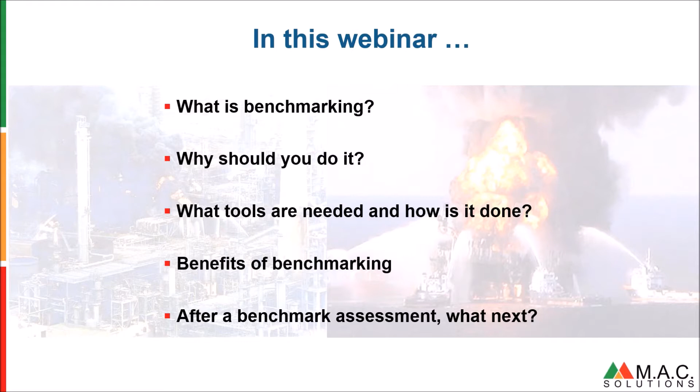So as an opening thought on the screen there, if you were asked to tell anyone, a regulator or a senior manager further up in your company, how well your alarm system performed, could you actually tell them, hand on heart, how good your alarm system is? And how would you be able to do that? The way you would do that is by measuring your alarm system.

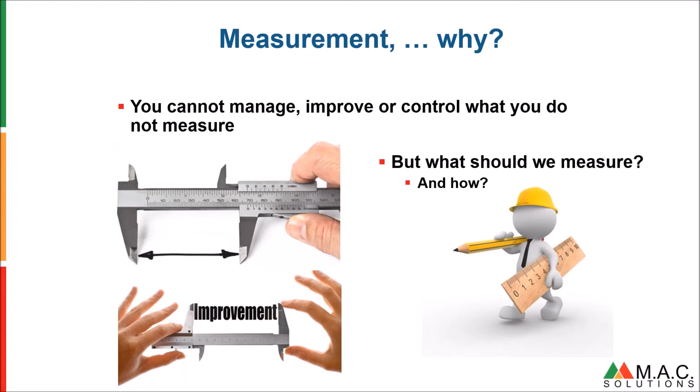And I'm sure we've all heard typical quotes and adages: you can't manage, improve or control what you don't measure. You've got to do some kind of measurement. The real question you want to know is, okay, what am I going to measure and how am I going to measure it? It's all about alarm system benchmarking. What and how. They're the really important things today.

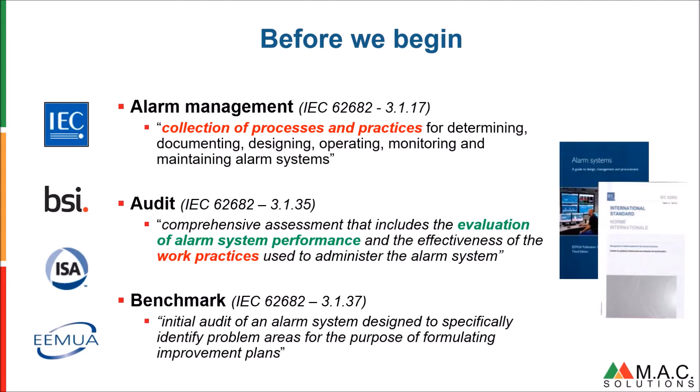So looking at audit and alarm management, yes, we're looking at numerical performance, the alarm system performance, but we're also looking at work practices and processes. It's not just a straightforward numbers game. So just moving on, if we look at the alarm management life cycle, if we're going to look at improving our system, we need to know what it is we need to improve. And that's the whole point of doing a benchmark assessment.

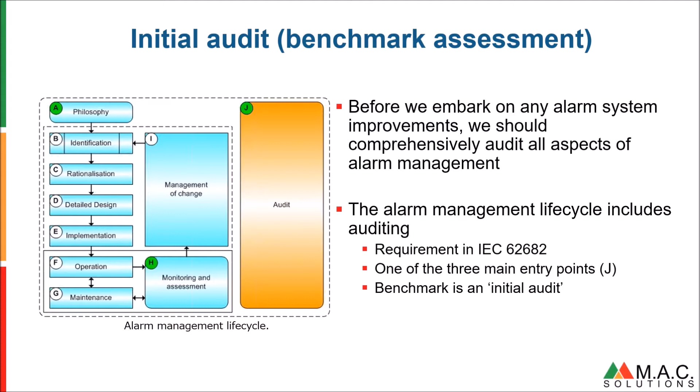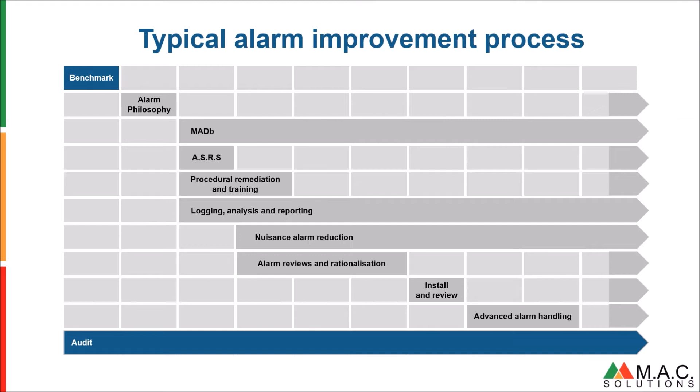But you are also going to need to review your control system. Is it configured correctly? Are there any design guidelines, default set for alarms? Alarms should be turned off unless justified. Hysteresis settings, for example, and timers. How are they designed? You're going to be looking at site procedures as well as your control system.

And in site procedures, let's look at alarm philosophy. Is there one? Is it appropriate? Does it comply with the requirements of the standards? What about procedures such as management of change? Is that appropriate for alarm management? Do you have procedures, for example, for shelving of alarms? And more importantly, while you're looking at these things, are they actually used? Are they in general use?

In order to do all these things, and I will elaborate a little more in a couple of slides' time, ideally you want to have a consistent approach. You are going to interview operators on the plant at their place of work. That's really important that you carry out your operator interviews to find out how the system works for them. Not how good or bad the operator is, but how the system works for them.

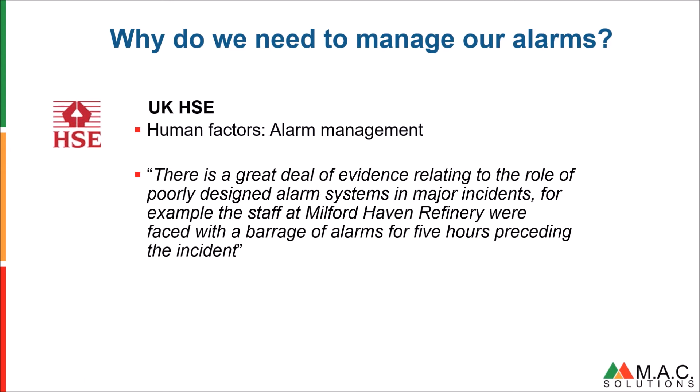So why do we need to manage our alarms? The regulators expect it. If you're in the UK or Europe, Seveso regulations or the COMAH regulations in 2015, which is the enactment of the Seveso directive in the UK. This is a legislative requirement. There is a requirement for you to manage your alarms. It's not an option. So there may be in other countries other regulations and other directives which must be complied with. So why do we need to do it? It's expected, and in some cases you have no choice.

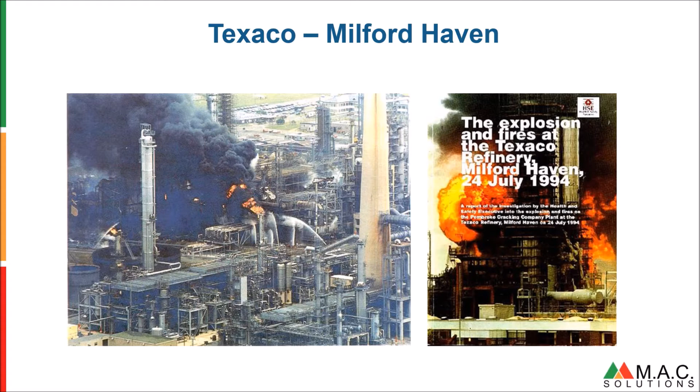Briefly looking at the Texaco Milford Haven incident, which happened in 1994, there was an explosion and some fires on a chemical plant. Our Health and Safety Executive in the UK carried out an investigation. Fortunately, no one was killed, but about £48 million was lost. 26 people were injured. The HSE commissioned a report by two guys called Bransby and Jenkinson. And the key factors they came up with were there were too many alarms and they were poorly prioritized.

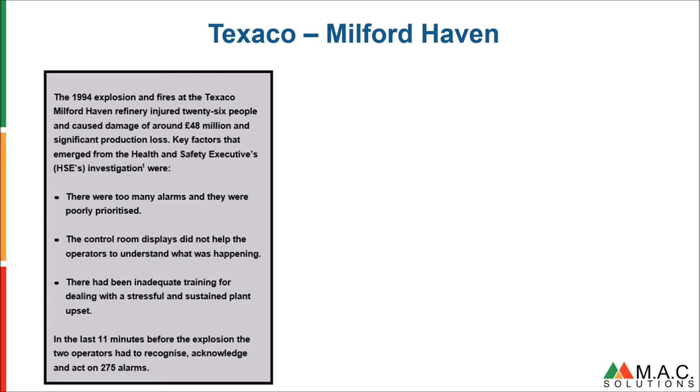I believe about 87% of all the alarms on the plant were labeled as high priority. They had 275 alarms to deal with in the 11 minutes before the explosion. That's 1 every 2 seconds, approximately. The guys had no chance to deal with the alarms. They couldn't control it. Maybe they could have done if their alarms had been more appropriate. Control room displays didn't help them.

So questions you should be asking yourself as part of your assessment, as part of could you justify how your system works: do you actually know how many alarms are in your system? Have you reviewed the priorities? Have your operators been trained? These are some questions you should be thinking of that drive you towards having your benchmark assessment.

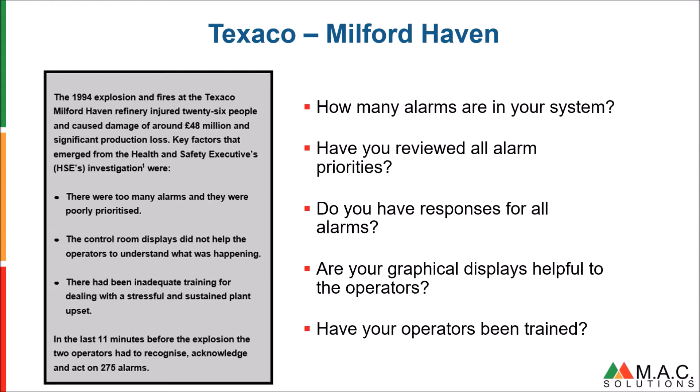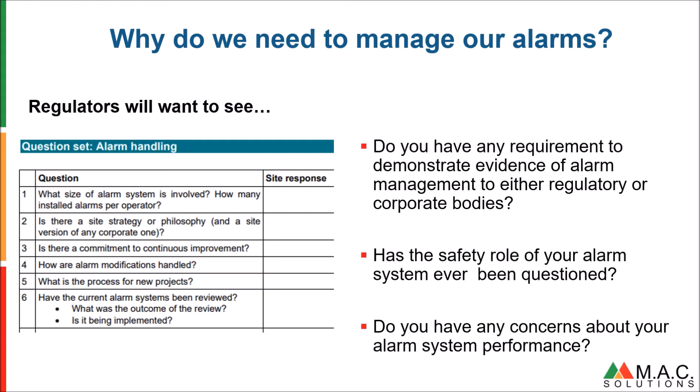That's one question. What about your alarm system performance? If you operate a control system, as opposed to you go to a control system as an integrator or a consultant, do you walk into the control room and hear the alarm system going beep, beep, beep, and you walk out of the control room thinking, that's not good. We need to do something about that. What are you going to do? And how are you going to do it? Your benchmark assessment will tell you.

What if I think it sounds a lot of work? Do I really need to do it? What might it cost if I do nothing? Okay, there's a potential for harm to the environment, to people. You may face regulatory prosecution, fines. Okay, really? Is that going to happen? Regulators and the judiciary, certainly in the UK, are getting tougher. Let's have a look at briefly 2 examples.

Last year in 2017, although not all to do with alarms, a water company was fined £20,400,000 for environmental breaches. During the trial, the prosecution made statements: alarms going off for days on end, certainly for more than 24 hours. Another alarm should have been dealt with in 2 hours, took 37 hours. These are statements from the prosecution to do with alarms.

The water company were given 21 days to pay, and they were told that the costs had to be borne by the shareholders, not the customers, and the courts would be watching to make sure that was the case.

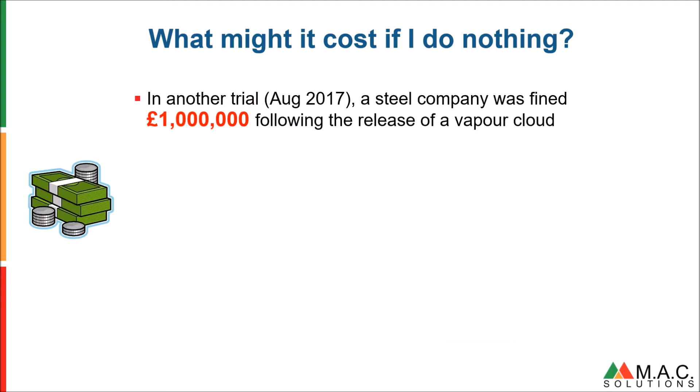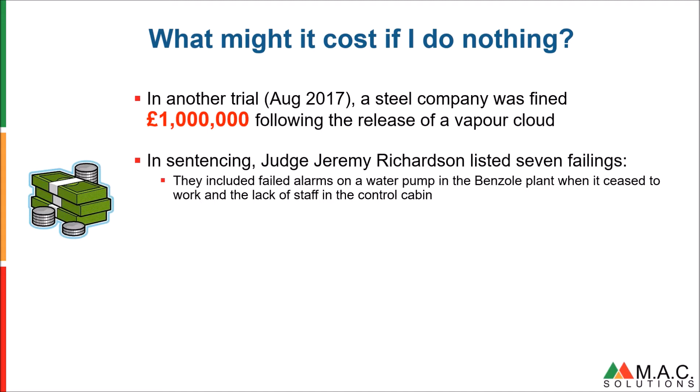Another trial last year, a steel company was fined £1 million. In sentencing, the judge listed 7 failings. They included failed alarms, a lack of staff in the control cabin. Something you might consider looking at when you're doing your benchmark assessment. Is the alarm system in an unmanned control room? Is it manned all the time? Do they have an appropriate number of people to respond to alarms? Just something else you might like to think about in your assessment.

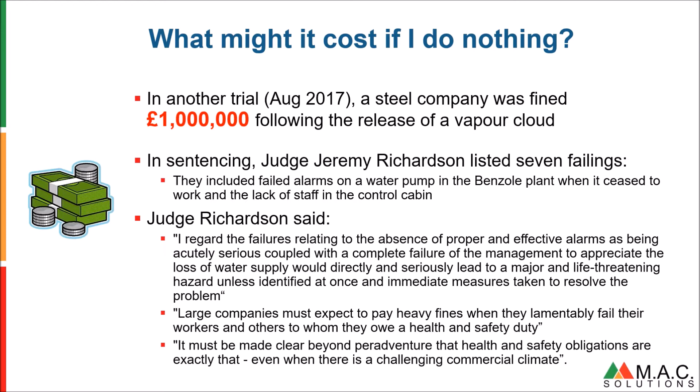When the judge summed up, he regarded the failures relating to the absence of proper and effective alarms as being acutely serious. Large companies must expect to pay heavy fines when they fail in their health and safety duties. It must be made clear that health and safety obligations are exactly that, even when there's a challenging commercial climate. Yes, alarm management will have a cost associated with it, but that cost has to be less than the fine that you will attract if you do nothing. And that's what's happening with regulators and judiciary at the moment.

So, bearing that in mind, as an operator of an alarm system, how confident are you that everything's being addressed and everything's working properly? Do you absolutely know without doing a comprehensive benchmark assessment? I carried out a benchmark assessment about 4 or 5 years ago on a pharmaceutical site. They were regulated by the FDA. They were making pills. They were a top-tier COMAH site, which is control of major accident hazards, for those people who don't know that. And they had an environmental permit.

In their COMAH report, they had taken credit for alarms in protective systems. So operators and their response to alarms were part of the layers of protection for the safety systems. The FDA required that before batches were started, a campaign of batches, they had to test certain measurements and alarms. It was all in their regulatory requirements. In the environmental permit, a number of alarms were identified that were fundamental to the monitoring of point source emissions to atmosphere, to water.

Unfortunately, on this site, alarms were not only routinely ignored, but they were turned off, because the operators had been told the control system has been configured to take care of everything. If an alarm occurs, it will be put into a software safe state and you don't have to worry. When you come back from your meeting, and yes, they did leave for 2, 3, 4 hours at a time from the shop floor, when they came back, all you have to do is press retry. It'll all sort itself out. They were in breach of all their regulatory commitments, and they didn't actually realize this until I did an assessment and pointed all these things out.

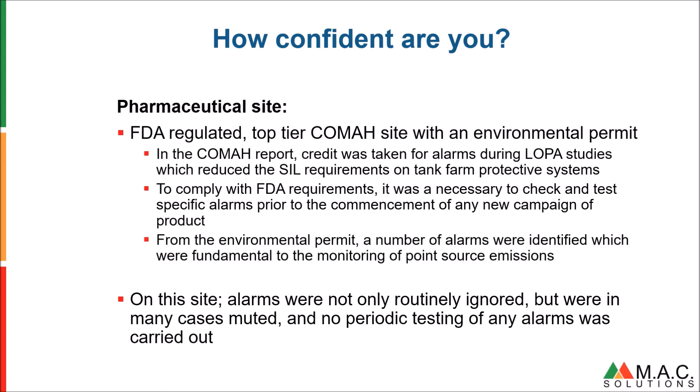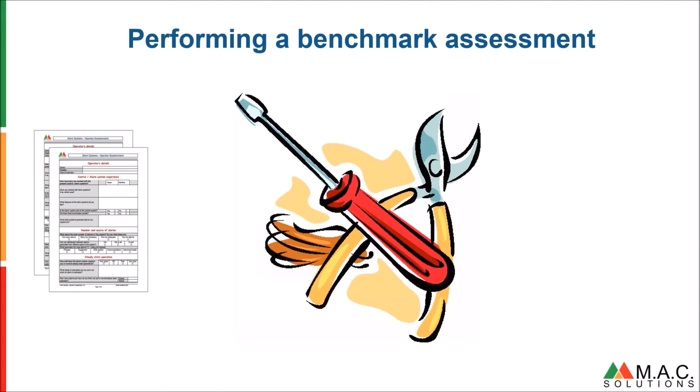So, just something to think about. Is there anything like that on your site? Are you aware of everything? Does everybody understand their requirements and their regulatory obligations? If not, how are you going to perform a benchmark assessment? Do you need any specialist tools? Okay, I've mentioned pre-prepared questionnaires before. There are some examples in the EEMUA guidelines that you can use and build on those questions, little aide-memoire notes to remember things. So you need some questionnaires.

You're going to need a software analysis tool, such as ProcessVue Analyzer that MAC Solutions provides. We sell a tool for looking at your alarm rates. How many alarms per 10 minutes do you have? Is your alarm system overloaded? What are the frequently occurring alarms? You will need some kind of software tool to analyze your data. That's part of your assessment.

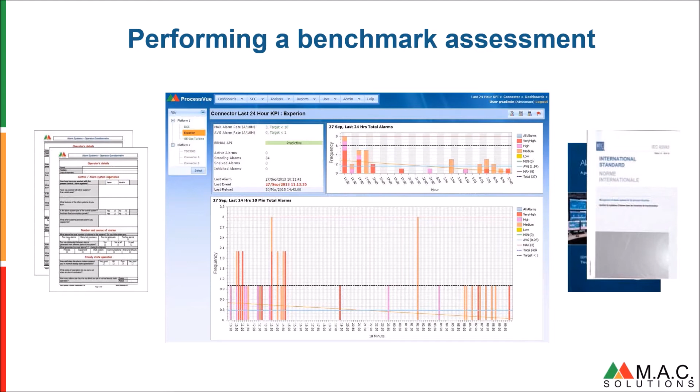You will also need, obviously, the current versions of standards and guidelines. They're the real tools you need. So some are easy, software questionnaires, you can write them out yourself, copy them out of the EEMUA guidelines. You will need an analysis tool like ProcessVue Analyzer. You will need the standards and guidelines. Two other essential tools you will require, your eyes and ears. Because when you're interviewing operators, when you're looking at processes and procedures, you need to observe and listen. That's an essential part of doing an assessment.

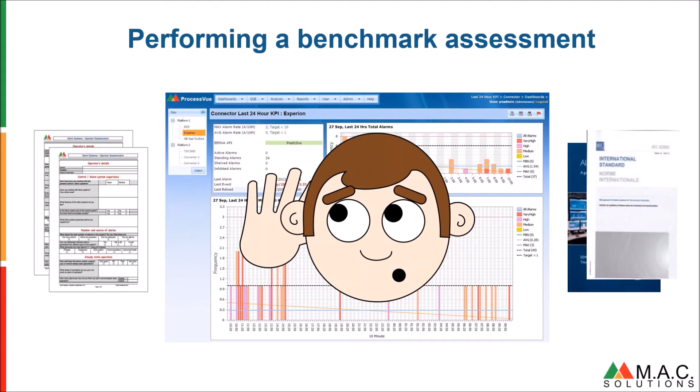Because, for example, an operator will tell you when you interview him, this is what I do, this is how I respond to alarms, this is how I shelve alarms. While you're writing your notes, listening to the guy and watching what's happening, sorry guys, we need to learn to multitask for this job, while you're doing that, you'll actually probably observe the operator doing something different to what he's just told you. So observation, listening, it's a really important tool. So they're the basic tools for performing a benchmark. Okay, if we move on, numerically, with our analysis tool like ProcessVue Analyzer, we're going to look at the alarm rates.

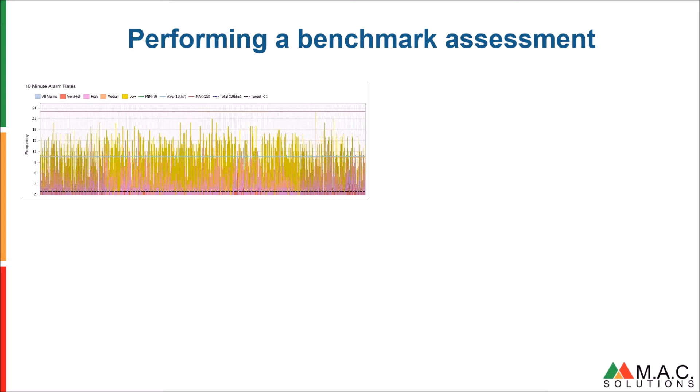How many alarms per 10 minutes do we get? What are the most frequently occurring alarms? What is the distribution of priorities of alarms annunciated to the operator? These are three metrics that are part of the standards. They're recommended in the standards and the guidelines.

In the EEMUA guidelines, there's also a thing called a usefulness questionnaire, which you distribute to your operators prior to your assessment, so there's some pre-work to do, and they assess or rate 10 consecutive alarms during their shift. Is it a useful alarm? Do they carry out an action? Is it a nuisance? And you build up a usefulness view of the system.

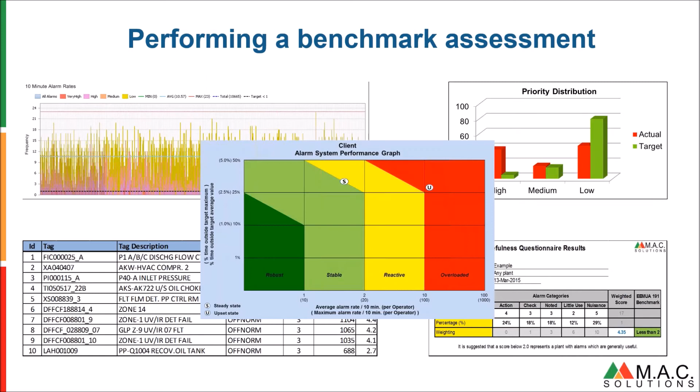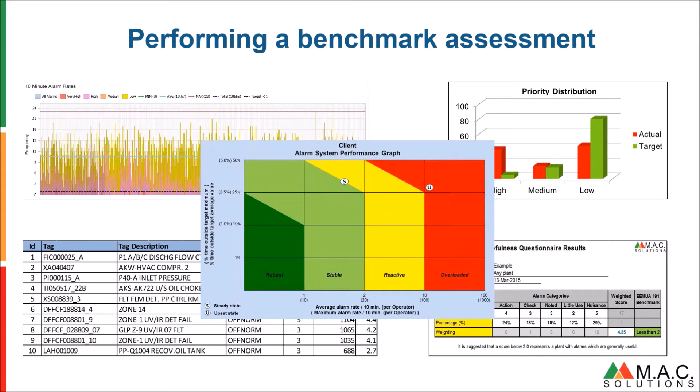You'll also look at potentially, again in the EEMUA guidelines, there's a word model for the performance of your system in steady state and upset state. Is your system overloaded? Is it robust, stable? A number of measurements. So they're numerical measurements, which you will get from your numerical software analysis tool.

Okay, but that's just one small part, alarm system performance at the bottom of the screen. That's one small part. So holistically speaking, we're going to look at absolutely everything to do with alarms. The management. Okay, do you have an alarm philosophy? Is there a philosophy or a site strategy how alarms are managed? Are roles and responsibilities defined? Are all those things encompassed and enshrined within your philosophy?

I mentioned earlier, design guidelines. How are alarms designed? Are there defaults for hysteresis, for timers? Is that all there? What about the role of your alarm system? Does your alarm system have any safety role? Is it implicated in any safety systems? Are alarms and the response to alarms one layer of protection?

That's all included as part of your regulatory compliance with the FDA, the COMAH regulations, a safety report. You may have, for example, a drinking water inspectorate, whatever responsible regulatory body is associated with your process.

What about procedures and documentation? We look at those. You need to read all those procedures and through your observation, find out if they're being used. Again, an assessment I did a few years ago. Yes, we shelve alarms. Yes, we manually record them in our alarm shelving book. There it is at the side of the console. I looked in the book and I found the last entry was 3 years prior to the assessment.

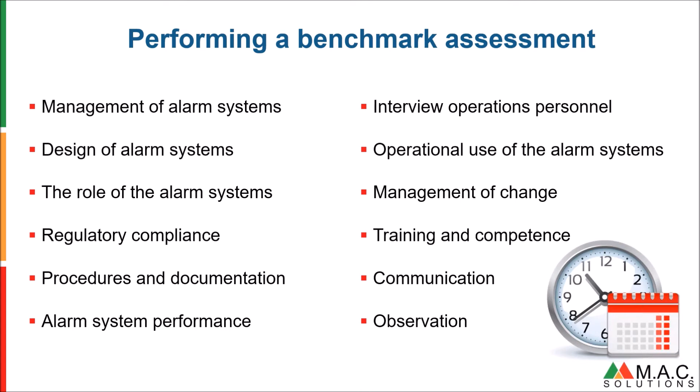Your report, if you do it properly, I always sectionalize things and put in what I'm looking for. What do the standards and the guidelines require? That's what I'm looking for. What have I actually found? What's the gap between them? That's my recommendation. Then decide on the classification of recommendation, mandatory, suggested, etc. That report's going to take you about 2 weeks. So to carry out a successful, comprehensive, effective benchmark assessment is going to take about 3 weeks of your time. So what are the benefits of spending that amount of time?

Okay, going back to our opening question, yes, you'll be able to answer those questions. Now you'll be able to say, yes, we're short on this, we need to do that, and we've identified it, and we're working on it, Mr. Regulator. So we have a plan in place, the regulators will be happy, your senior managers will be happy. So a benefit is you have those answers that at the beginning of the presentation, you weren't sure you could answer. By implementing your recommendations, you're going to improve things.

Take the quick wins first. Highlight in your report some quick wins. Nuisance alarms, the most frequently occurring alarms. The number of times I've done assessments and put up the most frequently occurring alarms. Everyone in the room says, oh, look, yeah, we know what that is. Okay, here's a suggestion how you can deal with it. Yeah, we could do that. Great. If you get quick wins, you'll get people on board.

People will be more likely to help with alarm management because it's not just you doing it, it's a team effort. They'll be more likely to be enthused because things are happening. They can see a change. And long term, you're going to have increased performance on safety, environment. You're going to have fewer plant trips and reduced operator stress. You don't want stress in your company.

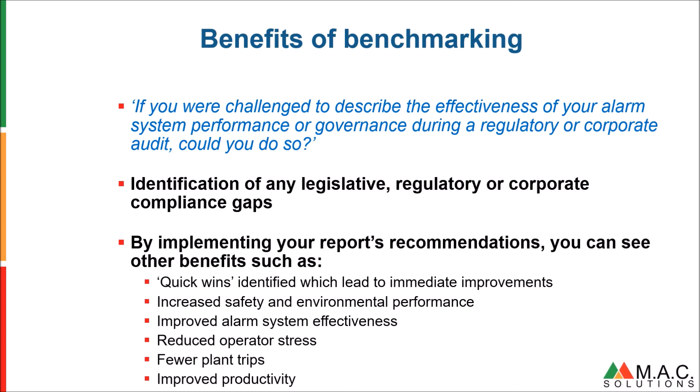Okay, so you've got a lot of work to do for an assessment. It's not a straightforward calculation of numbers. What next? That's where your real work starts. You think 3 weeks is a long time? Alarm management is for the lifetime of your plant and alarm system. You're going to have to budget for this and prepare a realistic budget. You will need to ask people. It's a team effort. You will have to take people out of their jobs to help with alarm reviews, if you rationalize your alarms.

You may need to buy tools you may not have. For example, a software analysis tool like ProcessVue Analyzer. You may not have a master alarm database, and you need a tool like ProcessVue Guardian to manage your alarm database. You may not have the expertise to carry out certain tasks and may need to bring in your control system vendor, third-party integrators, external consultants. You need to think about this carefully and plan from your workflow, like I showed you on one of the earlier slides. Plan what you need to do, budget, but be realistic. And then begin your improvements. It's a big journey, but it needs to be done.